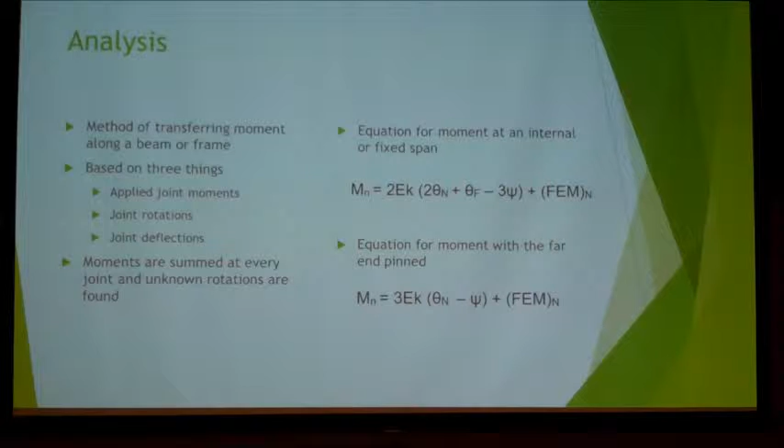My name is Ben Schwarz, and I did a program over the slope deflection method. I'm not going to go into all the details of this method, but this is something we learned back in Analysis 1.

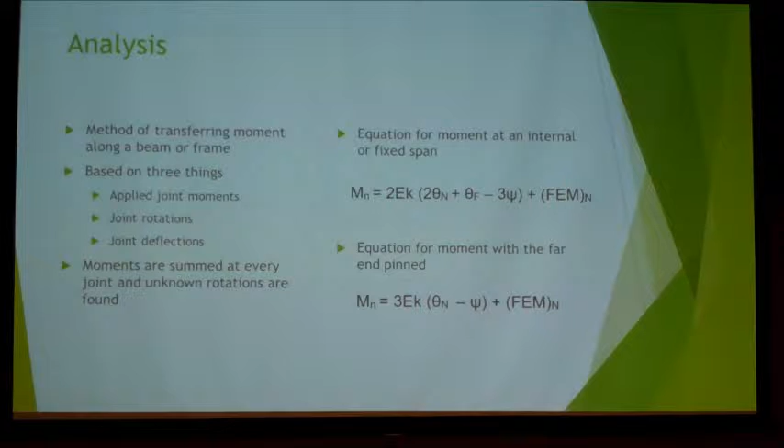It's essentially a method of transferring moments through a beam or frame. It's based on several things: the applied joint moments, so basically anything you're adding to any specific joint, and the fixed-end moments. It's also based on the rotations of all your joints and whether any joints have any deflection.

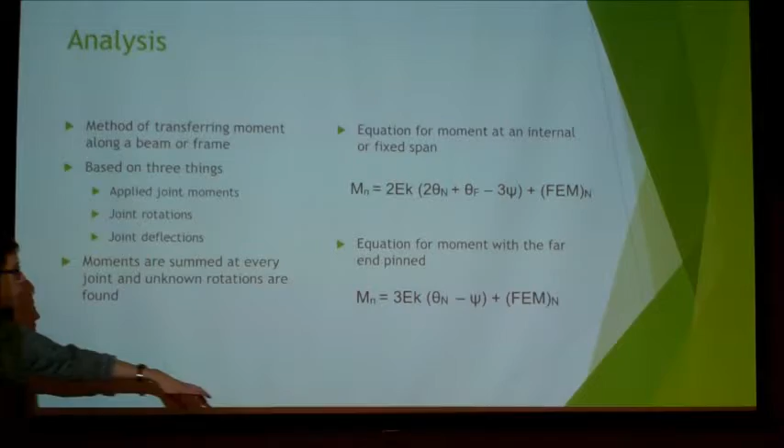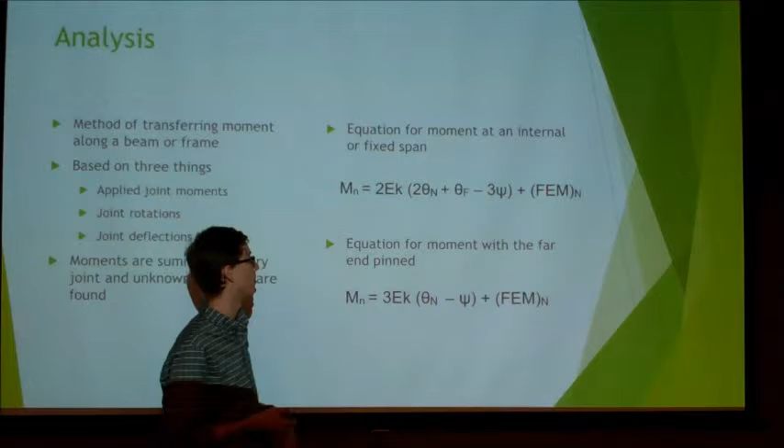Essentially, you're using one of these two equations. This is your equation for an internal span, or both ends fixed. You have modulus of elasticity, this constant, which is just the moment of inertia over the length. And then you have the rotations at each joint, your near end, your far end. You have, if there's a deflection over the span of the member, that's the change in angle of the member, and then fixed-end moment added in there.

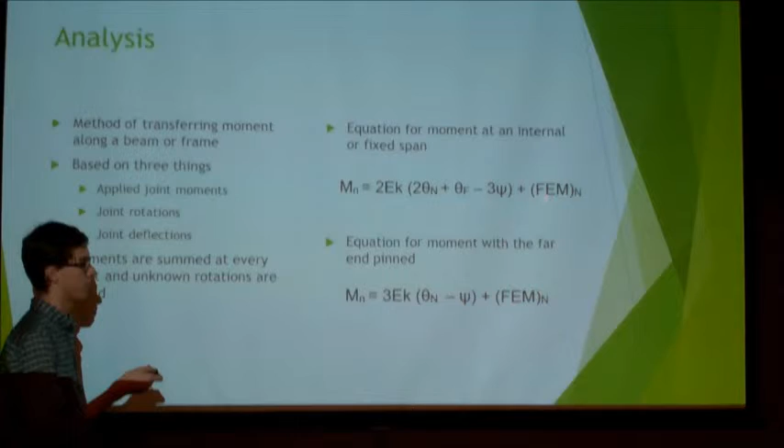You also have this equation in case you have a pinned end. So if one end's fixed and it's going towards an end that's pinned, you don't obviously have a far end rotation, so the equation changes a little bit.

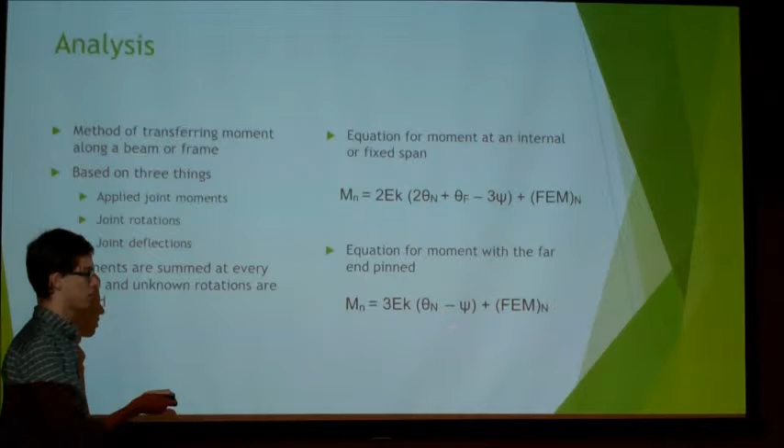Essentially what you do for this method is you take these two equations plus any extra applied loads, and you just sum them on every joint, solve for your unknown rotations, and then refine your moments.

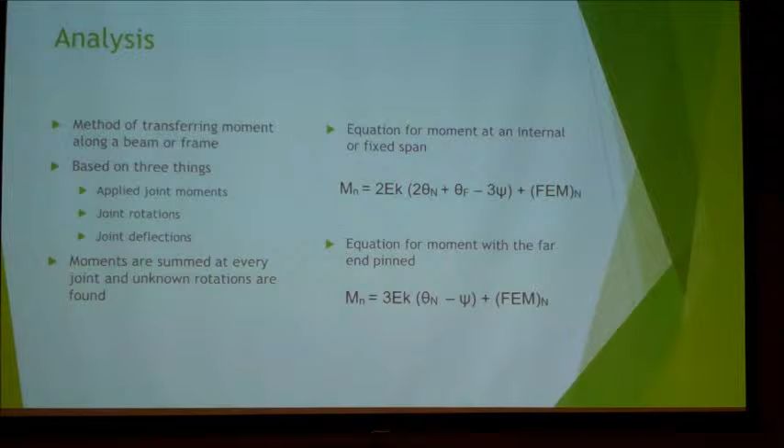If you want to look more into this method, it's all in your Analysis 1 notes, and I explain this more in my user manual. So it's not too complicated. It's mostly just writing a lot of equations and doing a lot of algebra, which my program does for you.

Now, my program can't do every possible scenario for this. It won't do frames. It only does just linear one-end-to-the-other beams. It only works for 1, 2, or 3 spans.

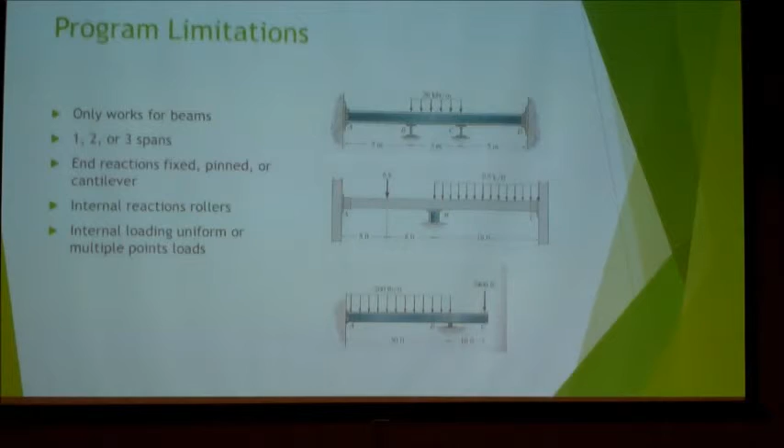As far as the end reactions go, they can be pinned, fixed, or you can have a cantilever applied to one of them, to either of them. And then all the internal reactions are just assumed to be rollers.

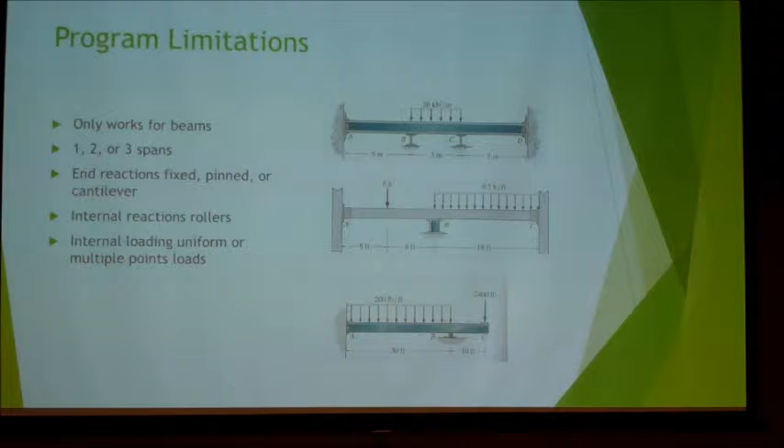As far as the loading in the middle, you can do a uniform load, or you can do one point load or several point loads. I'll do an example later of that. But all of these you can do with my program: multiple spans, certain types of loadings, and then certain reactions.

Now, the worst part about this program is trying to input it. Obviously, Excel is not a 3D modeling program, so you can't just draw a beam on there. Essentially, the way you do that is with a series of user forms that sort of guide you through the process. And that's where I'm going to do an example to show you how it works.

The first user form, you start by putting in your number of joints. You also put in your modulus of elasticity and your moment of inertia. However, for this method, those just have to be constants, so your moments will always be the same no matter what your modulus and your moment of inertia are. It only changes what your rotations are. So those numbers don't matter so much. You can put anything in there and you'll get the same answer for your moment for the same beam.

Then you basically go through a series of user forms that go joint by joint, and you do any reactions, what kind of loading, span lengths, that sort of thing.

They won't warn you if you're doing things incorrectly, so that's why you have to be very slow and methodical going through these. But once you know what you're doing, it's a really simple program. You just go joint by joint by joint. And that's where I'm going to do an example to show you how that works.

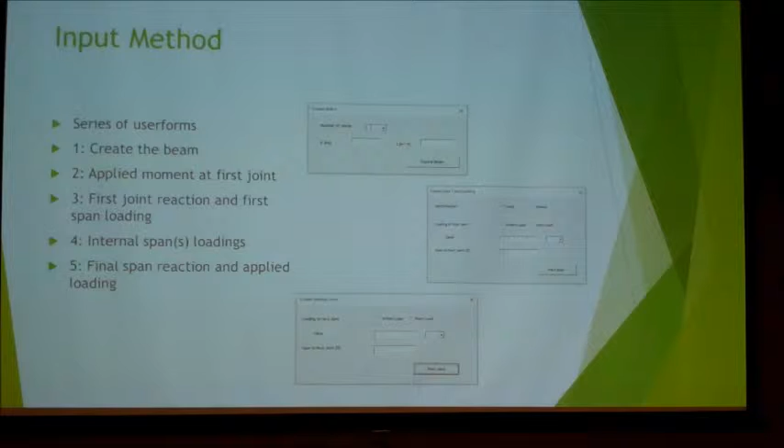My user form has two sheets that it outputs on. On the first sheet, which I'll show you in a second, it basically reiterates what you've already input. So it tells you here's the reactions you did, here's the loading, here's the spans. Everything you input goes into this sheet here, and I'll show you some more details on that.

The second sheet gives you your results. It starts by listing the fixed-end moments, which you all know how to calculate, but it'll just do that for you. Then it lists all your K factors, which, as I mentioned earlier, is just the moment of inertia divided by the length in inches. And then it gives you the rotation at all your joints, if it calculates those. Last, it just outputs your moments at every joint.

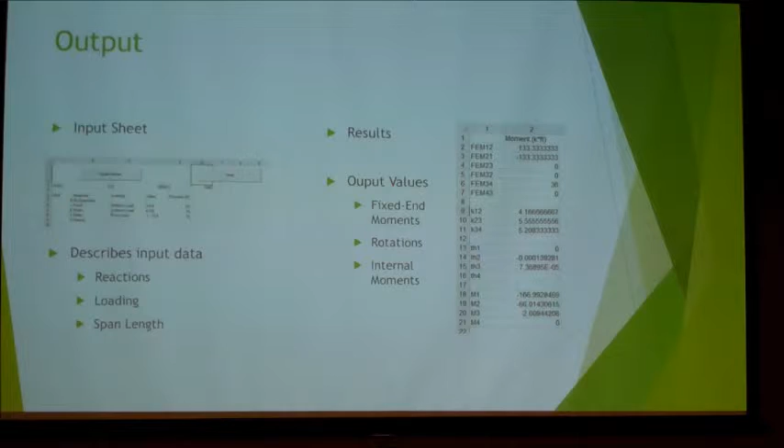So once you know how to set up your beam correctly, it just gives you the answer. It's very simple. So with that, I'm going to go ahead and do an example. This is the example beam I'm going to do. It has 2 fixed ends, 3 spans, 2 of those are loaded.

I'm going to have to take this off the slide, but I want to make sure we go through this very carefully, so I'm going to draw out this beam over here for reference as we put this together. I would not recommend trying to do this program without having the drawing of your beam, because you'll probably make a mistake or forget a part of it halfway through. So it's very important that you know exactly what you need to be doing.

Okay, so we have the first span with 2 kips per foot on it, the second span has no loading, and then the third span has 2 point loads of 9 kips each, and each span is 15 feet.

Like I said, if you're not doing this with the program, you would go to each of these joints and set up that equation twice, once going each direction. Then you'd have to set up all the equations and go back and solve for those rotations. You could do this by hand, it would just take a little while, but it's a lot easier if you just input it in your program.

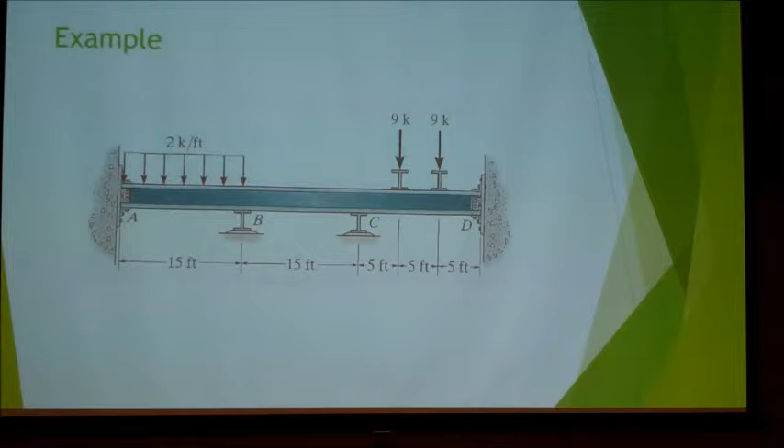So I'm going to go ahead and show you how to do that.

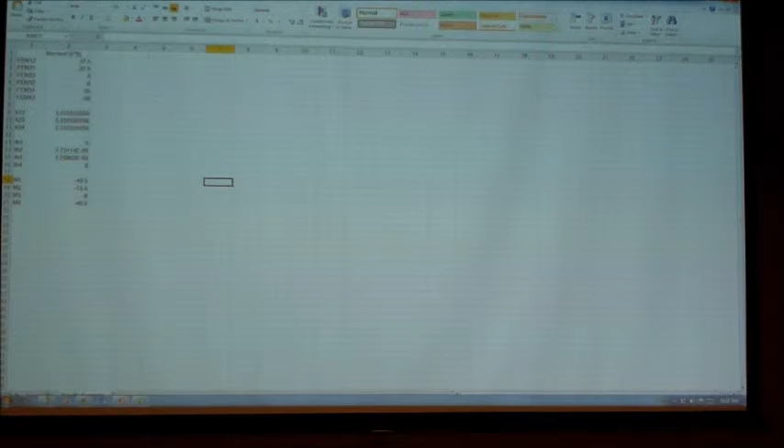So you create a beam. This is the first input user form that shows up. We select the number of joints. This includes reactions, it doesn't include cantilevers. So if we had an extension on one of these, we wouldn't include that, but we have 1, 2, 3, 4 joints.

As I said earlier, these just need to be constants. Unless you're looking for the rotation specifically, you will get the exact same moment no matter what you put in these boxes. I'm just going to put in some numbers that seem pretty realistic here. Now you basically read through your beam from left to right and input all the data as you go.

This first user form is about if there's any cantilever on the first joint. We just have a fixed reaction, so there's no extension to the beam. I hit no. Now we're at the first joint, it's asking what kind of reaction is there. We have a fixed end. Then it's going to ask about the span going to our right.

So if there's any loading and what's the length of it. I say there's a uniform load, its value is 2 kips per foot, and then we have a 15-foot span to the next joint.

Now we're at our second joint here. There is no loading, however I need to fill in all these spots, so I just put a uniform load of 0, another 15-foot span, next joint.

Now we're on our last span here. So on this one we have point loads, their value is 9 kips, and we have 2 point loads. And the span once again is 15 feet.

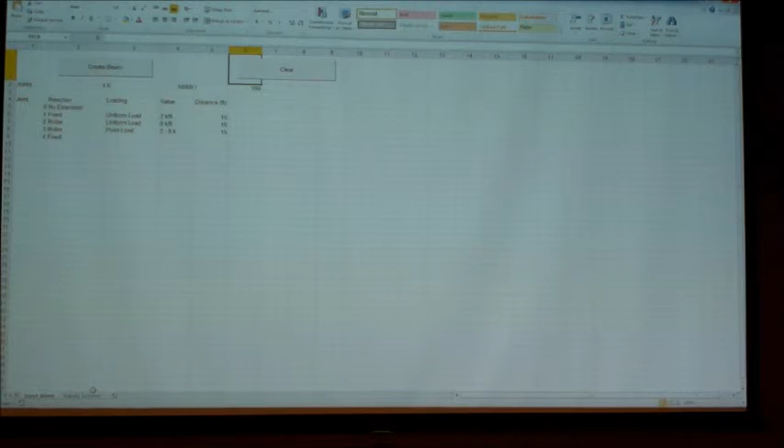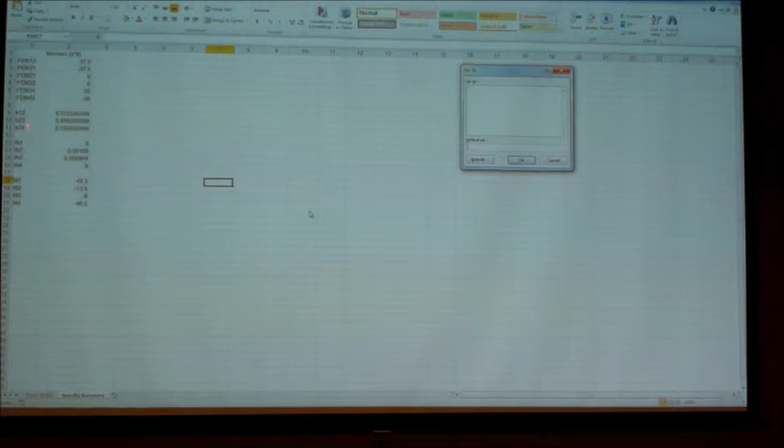Now we go to this sheet over here, and it gives our results. So these are the fixed end moments, from those 2 applied to each of those joints. This is the K factor for each span. These are our joint rotations, and these are our moments, and those are in kip feet.

So we know that the reaction here is 49.5 kip feet. The internal moment here is 13.5. The internal moment here is 9. And the internal moment here is 40.5. So just like that, it gives you all your internal moments.

One other thing is I wanted to make this as helpful as possible, so I use the notation we've been using in concrete, where negative moment is a downward curve, positive moment is an upward curve. So as you can see, I could draw out that these are curving that way at each of these joints. So now I know how I would design, for instance, a concrete beam or an I-beam. But that's basically how the program works.

Any questions? Yes? Can you make the 2 point loads different in your program? No, they have to all be equal, and they have to be equally spaced.

Concentric, okay. And if you do 1 point load, it goes in the middle. I may try to add that later, but right now they're all equal values and equal spacing for 1, 2, or 3 point loads. And all moments of inertia are the same?

Yes. Modulus of elasticity and moment of inertia is constant throughout. Any other questions?